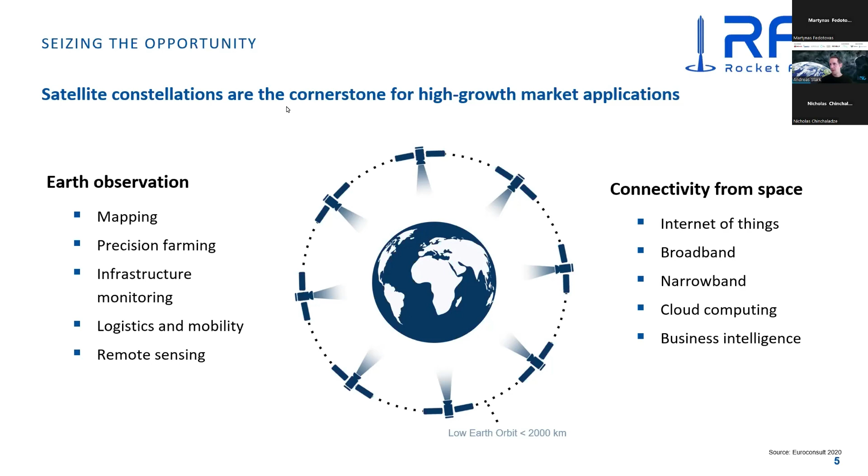So how are we trying to do that? First of all, superior technology. As you know, the heart of each rocket, its DNA, is the propulsion system. The more efficient the propulsion system is, the cheaper the access to space is—basically, the more payload per launch mass you can get to space, which brings down costs significantly.

You cannot start with a system and then try to make it cheap. It needs to be designed from the ground up to be cost efficient, using the right products and the right processes. From the beginning, a company needs to focus on industrializing rocket production, focusing on low cost and reusability. Once you've spent a couple billion building your launcher, it's really hard to find an affordable business model to provide access to space.

So we do that by using as much as possible industrial parts, very efficient production technologies, additive manufacturing, and so on, to create those cost advantages. And then the last piece is the last mile delivery—having a specialized orbital transfer vehicle or third stage that can not just deploy a satellite, but also provide in-orbit services and remain in space for a longer period.

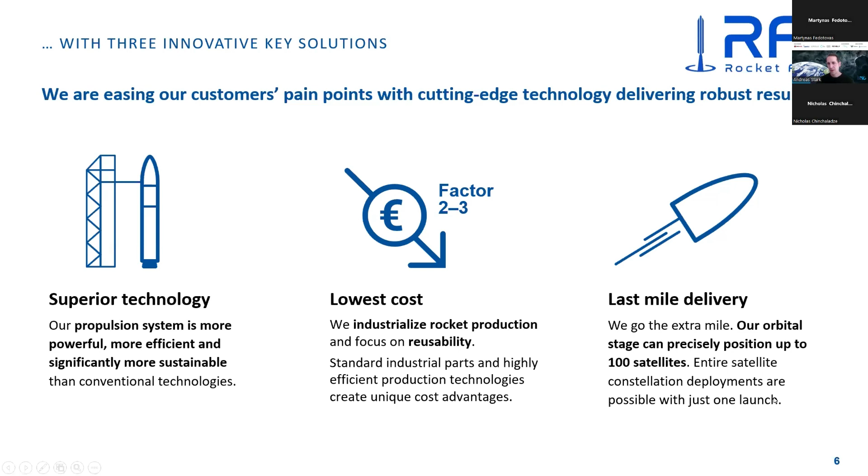So to go a little more into detail on how that looks in reality—as I said, the efficiency of the propulsion system is key. We are targeting a propulsion system that is an oxidizer-rich staged combustion engine, a fairly efficient method of propulsion. I'll dive into that a bit later. Around 100 kilonewtons of thrust, currently focused on lifting up to 1.3 tons to a polar orbit, using a 9-engine cluster in the first stage, and then the same engine modified as a vacuum engine in the second stage.

I don't know how familiar you are with rocket propulsion—I wasn't very much either, coming from the software world, so stick with me for a little introduction. The very common system in propulsion is an open cycle rocket engine system. You have fuel and an oxidizer—for example, liquid oxygen and RP-1 rocket propellant, or liquid oxygen and liquid hydrogen. The fuel and oxidizer need to get to the combustion chamber where they're ignited, doing a chemical reaction—burning, exploding, however you name it—to create a fast stream of particles out of the engine that creates thrust, pushing the rocket forward.

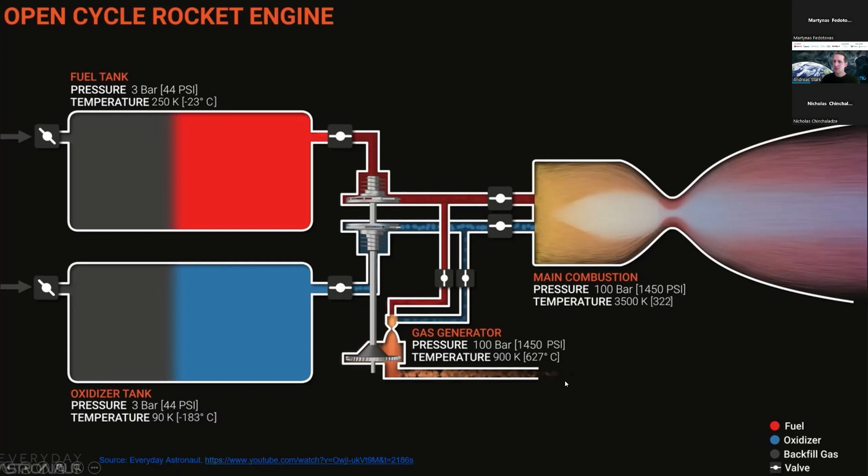The downside of using this is you're wasting quite some of your propellant just to spin the pump, and it's not used for propulsion—so your efficiency goes down. One approach to mitigating that and increasing efficiency is using the same principle, but instead taking the exhaust, the mildly burned fuel or oxidizer from the turbine wheel that spins the turbo pumps, and feeding that back into the combustion chamber to also contribute to overall propulsion and thrust.

And so this is what we do. There are two different ways: oxidizer-rich and fuel-rich. Oxidizer-rich means we pump all of our oxidizer—all the liquid oxygen we're using—through this turbine wheel, and only a small amount of the fuel, so that only a small fraction of the oxidizer burns and spins the turbine wheel. The heated-up oxidizer, with a little bit of burned fuel, plus all the fuel, meet in the combustion chamber and propel the rocket.

This leads to roughly a 7% increase in fuel efficiency. But as you know, if you're more efficient, you need to carry less fuel, and if you need to carry less fuel, you burn less, and so on. Overall, this results in a 30% increase in payload capability, which is quite significant. Also, since everything goes through this very hot combustion chamber, it's a very clean burn, and you don't get the sooty exhaust like you'd get otherwise.

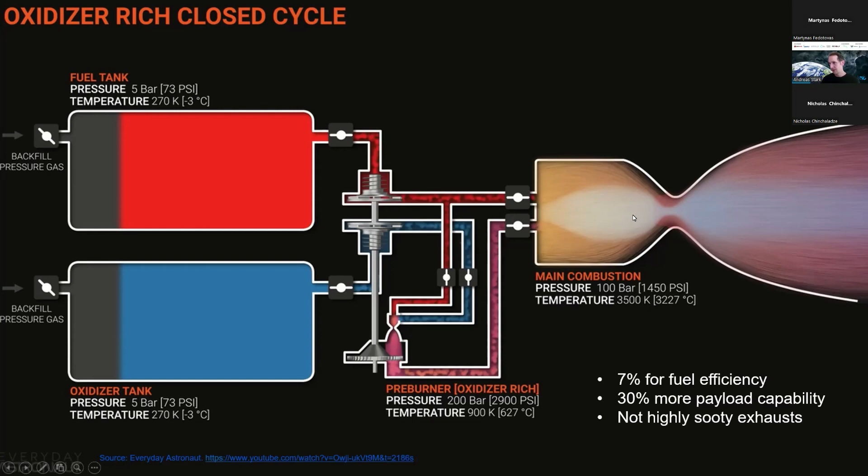As I said, the propulsion system is the DNA of the rocket. We had an online challenge, and many contributors, more than 2,500 people, voted and contributed name suggestions for our engine. In the end, the Helix engine was selected because it's the DNA of the rocket.

We say it's an automotive grade rocket engine. Think of it more like a Formula One automobile and not like a regular street car, but still trying to get a production setup where we can have serial production, as you would do for Formula One engines.

Some details of our engine, which we've already hot fired a couple of times successfully, including for some longer durations. As you can see, the fuel goes in, the oxidizer goes in, and then we have this pre-burner, which generates a stream to power the turbo pumps.

Here you can see the turbo pumps, the LOX pump and the fuel pump. They are spun by this gas stream from the pre-burner. In the beginning, you need to get the system going. There's a spin start system where you pump some gas through so it starts spinning, and you get your initial fuel to start combustion and ignition in the pre-burner, then pumping all the fuel and oxidizer into the main combustion chamber.

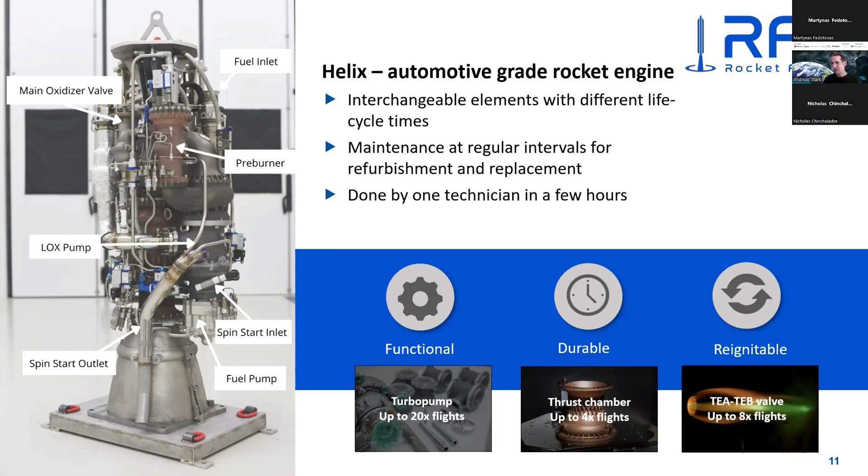Now, how do we test this engine and make sure it performs as expected? As Martynas introduced, I'm the team lead for the test stands, testing, and control systems. This is our current engine and second stage integrated stage testing test stand. It's located in Kiruna, Sweden, at the Arctic Circle, very remote.

We can leverage the nice infrastructure there from the mining industry and also from SSC, which has its headquarters there. As you can see, we have our main test stand here. We call it the vertical test stand, right here with this housing.

In the winter, at -30 or -40 Celsius, people can still work on the engines while heating this housing up. It has two positions: an engine position and an IST position in the back, so we can pretty quickly interchange between the two tests.

At the side, we also have a second, smaller test stand. We call it the horizontal test stand, for power pack turbo pump testing, for example. And then you see the site layout, with some storage for fluids and propellant, a workshop, and offices.

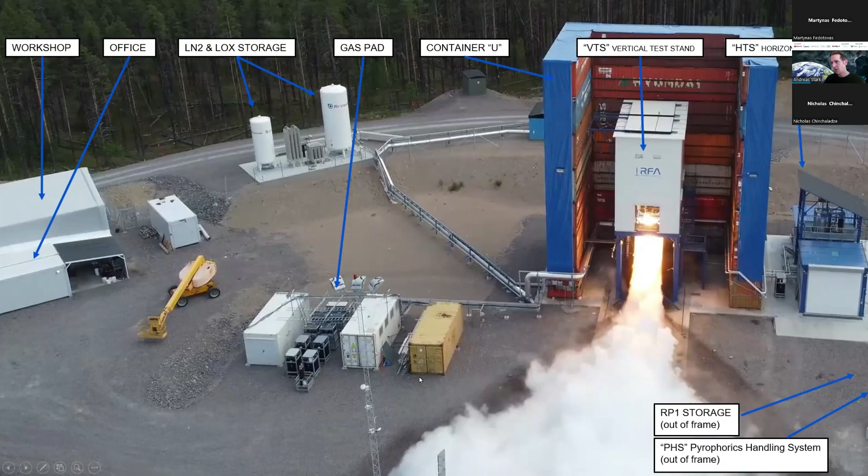Sometimes you get some reindeer visitors or foxes as well. A couple of weeks ago there was a little baby reindeer close to the site. Obviously, we make sure before we do any hot fires that it's all clean.

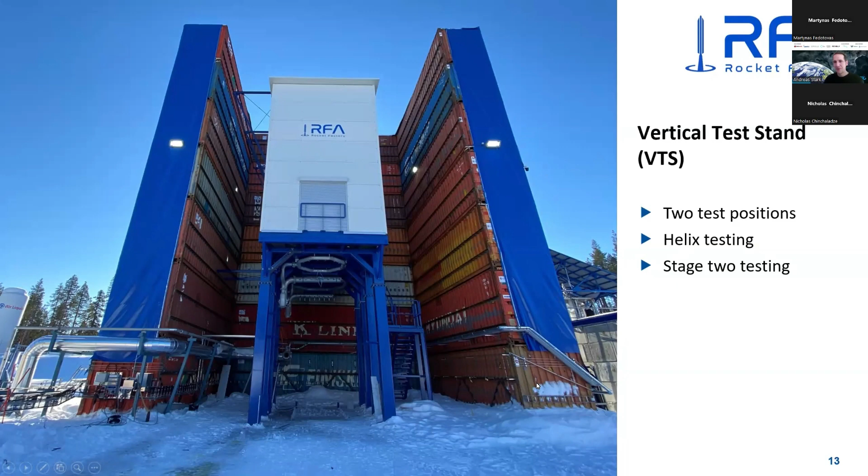So yeah, this is the vertical test stand, with two test positions for the Helix testing and stage 2 testing, in a nice snowy winter wonderland currently, and hopefully soon in a more human-friendly summer in Sweden.

And then the horizontal test stand for power, we call it the power pack. The power pack is a pre-burner and the turbo pump, used to do optimizations and many tests there. This is the second test stand that we utilize here as well.

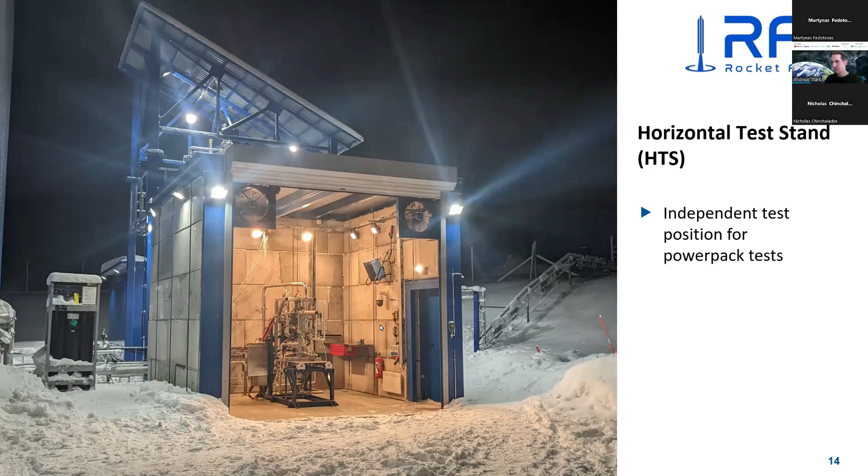All right, so now let me show you a little video of our hot fires.

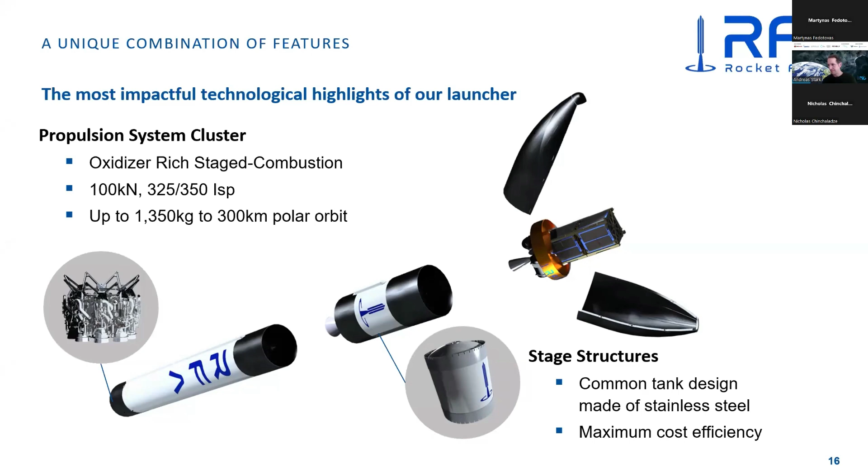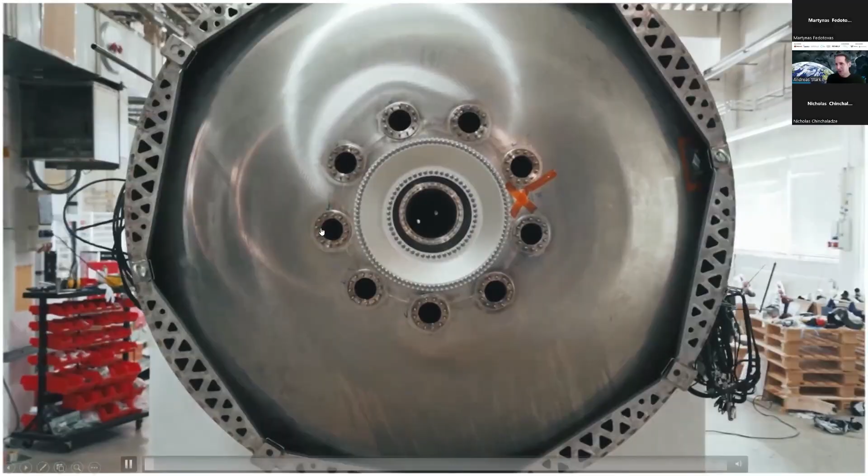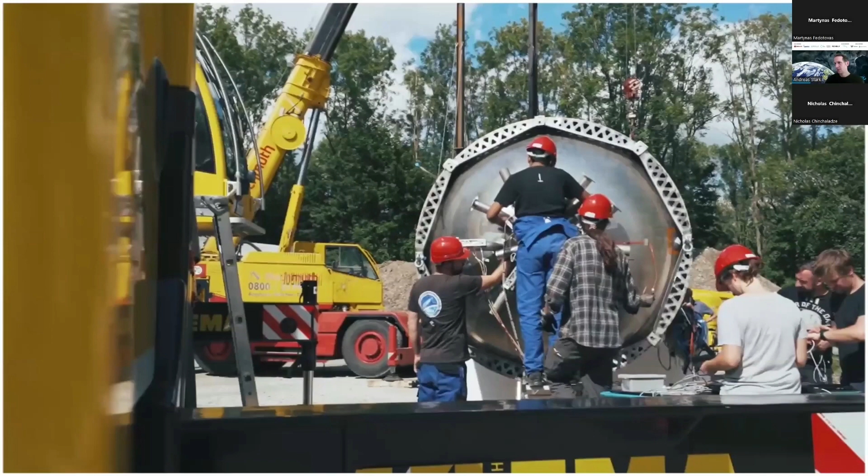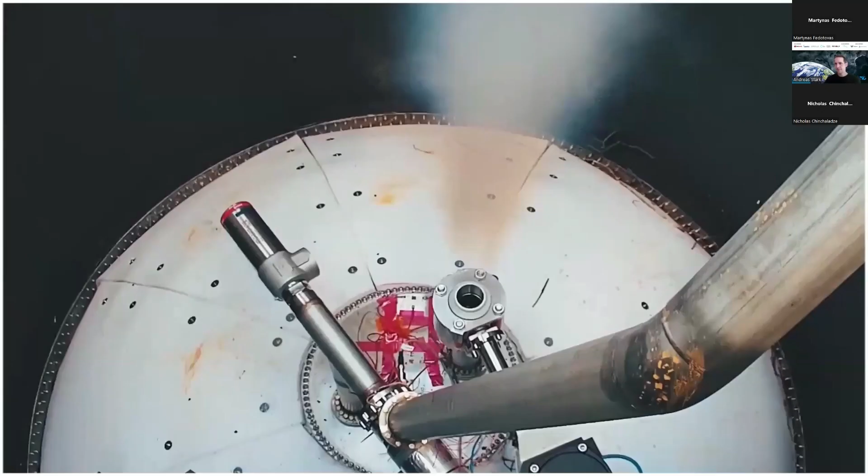And also we do some tank testing, so here's a quick video from a burst test that we did in Augsburg, Germany. Sometimes it's really important to go over the limits to know where your limits are, and this was exactly what happened here: going over the burst pressure of the tank to see where it really is.

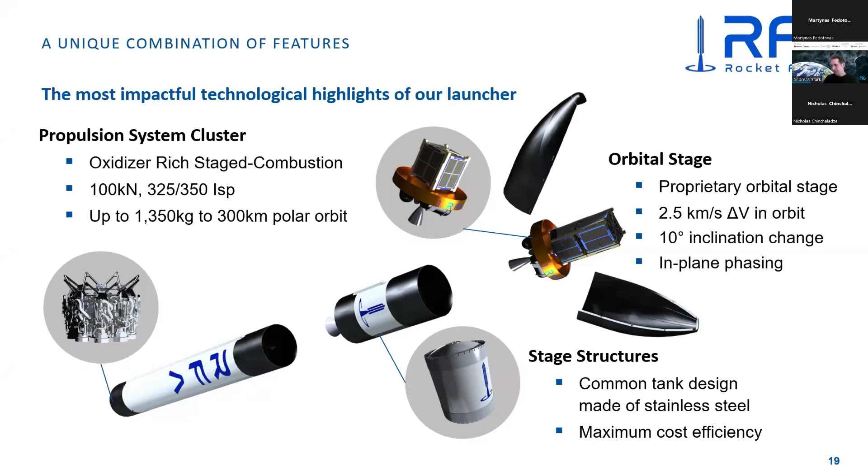The third aspect is this orbital stage, an orbital transfer vehicle that can fly missions in space and stay there for longer times, deploying satellites at various times and positions, for example. We use that for dedicated and rideshare missions, and going forward in the next couple of years, it will operate as a taxi fleet that is continuously launching, being repaired, and upgraded.

The first stage is really the cost driver - half of the cost is the first stage. Also, production capabilities are a problem once you target 50 launches per year, because you need to build 50 times 9 engines. So if you cannot reuse, you're really in a bad spot, and manufacturing all of that is a challenge by itself.

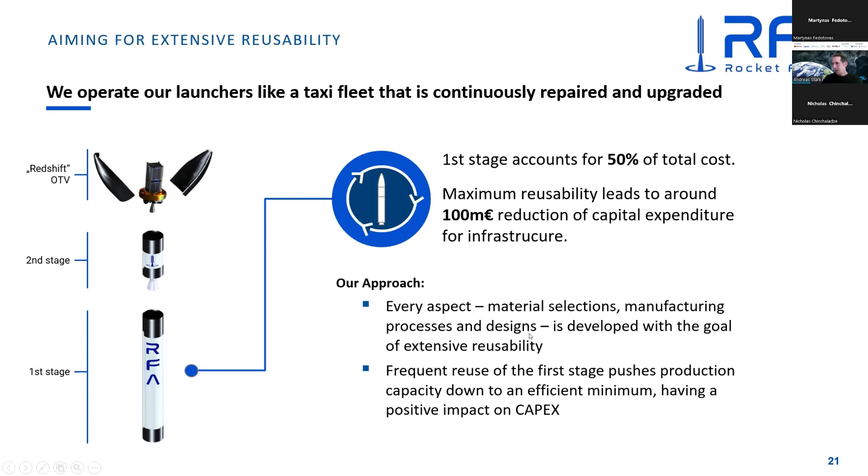So generally, where are we company-wise? We started in 2018, then built a turbo pump, a prototype of the second stage, test fired the orbital stage, built the test site in Sweden as you saw, moved to a new facility to enable the growth of the company, did a main engine test campaign, built the tank demonstrator and did the burst test, and then in April did the flight configuration of the Helix engine with that long duration hot fire campaign. 2023 should be a very exciting year, targeting liftoff by the end of the year.

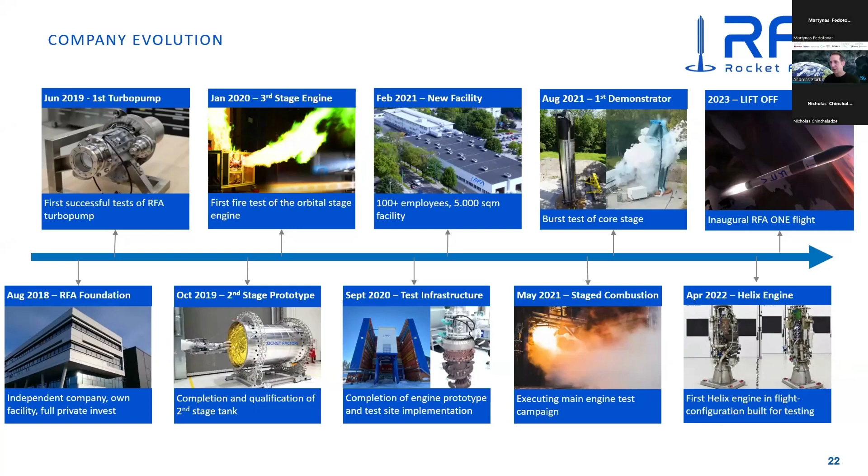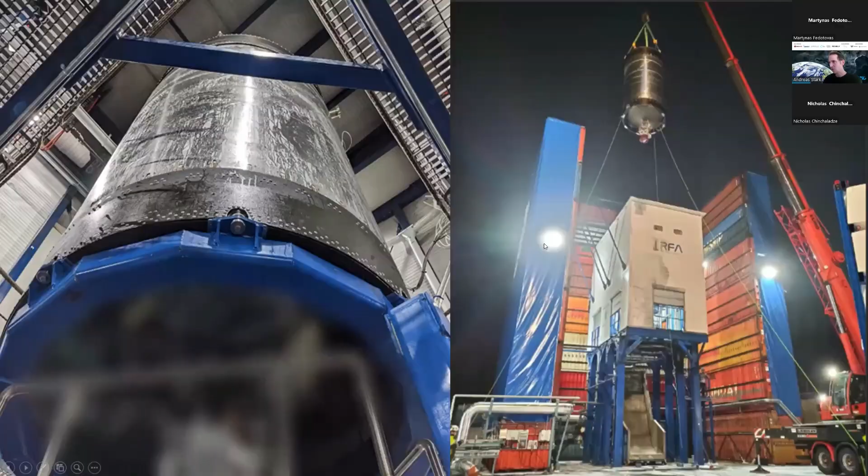Where are we currently? This was our second stage for the integrated stage test, ready to go to Sweden. It's already there on the test stand - as you can see, it was lifted in there by the crane, and it's being tested currently right there.

Our launch site on the Shetland Islands is also coming together quite nicely. Just before Christmas, we erected the launch stool, and the next steps are erecting the umbilical tower and the rest of the infrastructure, so that we're ready to do the stage 1 integrated testing campaign, then stack tests and launch.

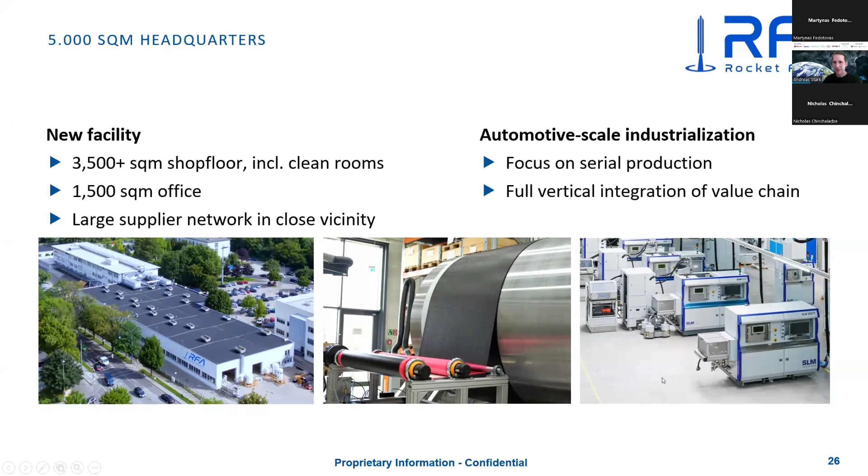A little bit about RFA: we have a quite large facility, including clean rooms, a large office, and a good supplier network in southern Germany, where much of the aerospace and automotive industry is located. We're also building up our automotive-scale industrialization, focusing on serial production - additive manufacturing, metal 3D printing, and streamlining all of that.

We're a quite fast-growing company. Now we are at 220 full-time employees from over 30 nations, so it's a quite interesting and nice work atmosphere working with all these diverse people from around the world. We also have a lot of experienced people in key positions that bring a lot of industry experience, coming from, for example, Rocket Lab, Blue Origin, ESA, and so on.